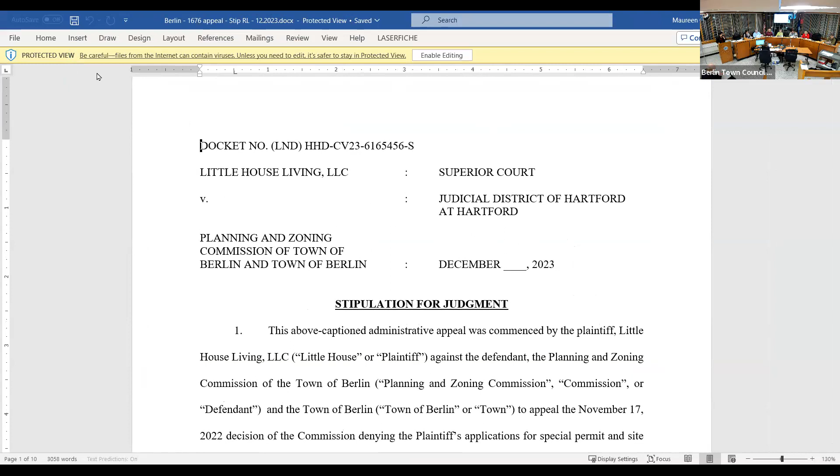And during the public hearing, the plaintiff argued that there's a need for affordable housing in town, and that the town is not exempt from the affordable housing appeals procedure that's in 8-30G of the Connecticut General Statutes, because 10% of the town's housing stock is not affordable.

So the statute does provide that to be exempt from the procedure, the town has to have 10% affordable housing stock. The public hearings, again, just where we are procedurally on those pending 8-30G applications, the public hearings have been closed, but the commission has not voted on those yet.

The deadline to vote on those applications has been extended, and this was by agreement with the applicant, to January 3rd, 2024. So then, on paragraph 5 on page 2 of the stipulation, it's the intent of the parties to resolve these matters without the time, expense, and risk of further litigation, and without any admission of liability or fault.

So I just want to make a comment about that.

I would say this too, I've been practicing land use law for 25 years now. It is the expectation of the court that in these matters, one of the first things they do when they get an appeal is they talk to counsel for the parties about resolving the matter.

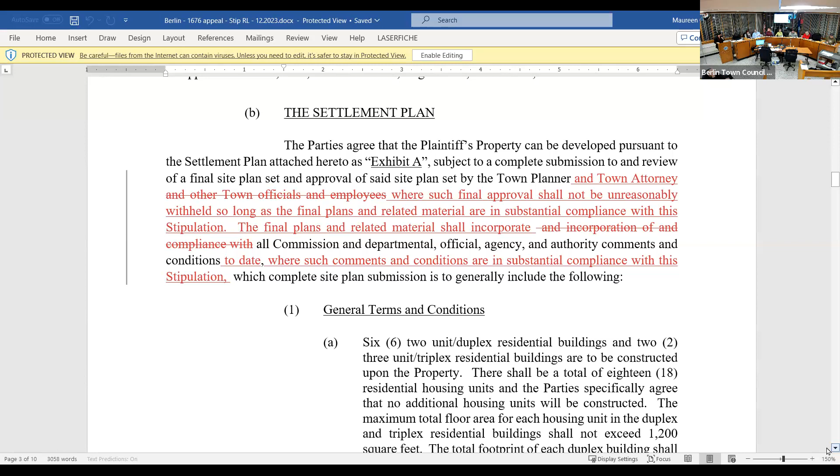So just jumping to the general terms and conditions, what's contemplated - this is B1A on page 3 - is 6 2-unit duplex residential buildings and 2 3-unit triplex residential buildings. So there's going to be a total of 18 units, and that was the number on the plan that got denied. The parties specifically agree that no additional housing units will be constructed. Then there's some specifics about the bulk requirements of those duplex and triplex buildings in terms of square footage, footprints, height, and so forth. They're all going to be 2 bedrooms, 2.5 baths with a garage.

And then one is going to be an accessible unit, a type A accessible unit. Again, we've got height requirements toward the end for the residential buildings, as well as the community center that will be an amenity. So the center island unit is coming out of there that was originally proposed. There's going to be a community center, and also a property maintenance room connected to that, with an overhead garage door.

You'll see further on too, it's mentioned there's a contemplated pervious patio area and a fire pit. So a lot was talked about as far as quality of life, so that amenity has been negotiated to address the concerns with regard to that.

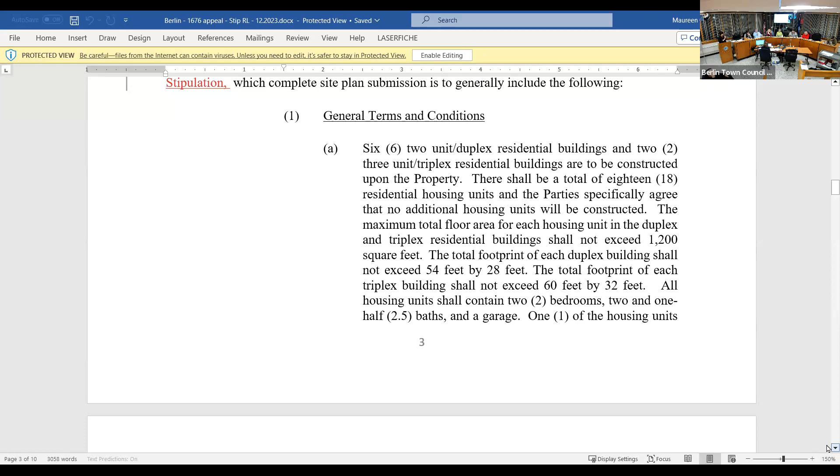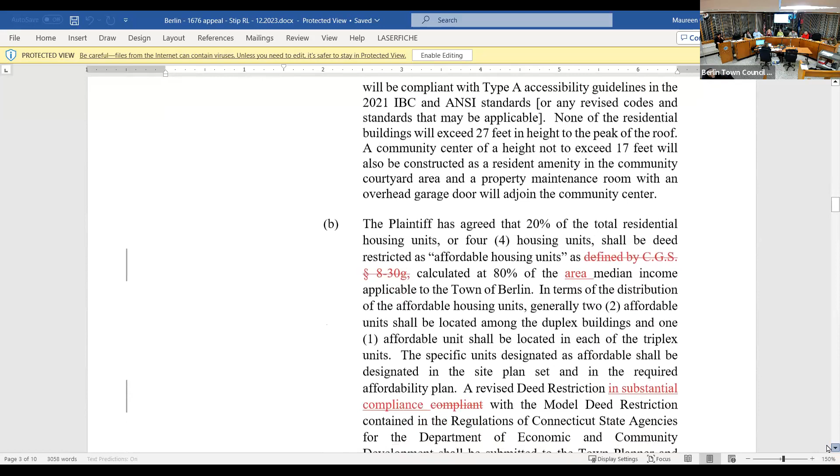I don't want to get into that right now because I want to get to Zach. But there's been quite a bit of discussion about architecturals. The architecturals are posted - this is in C, bottom of page 4 - covering the landscaping and the streetscape, material design standards, lighting, fencing, and signage. So you see details.

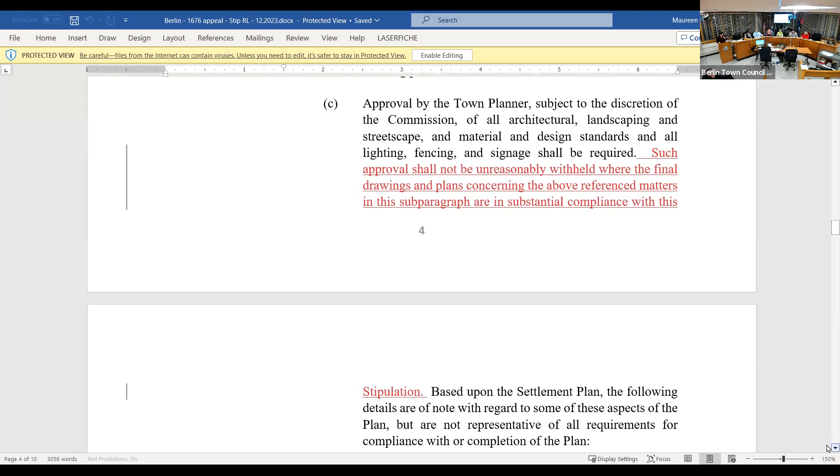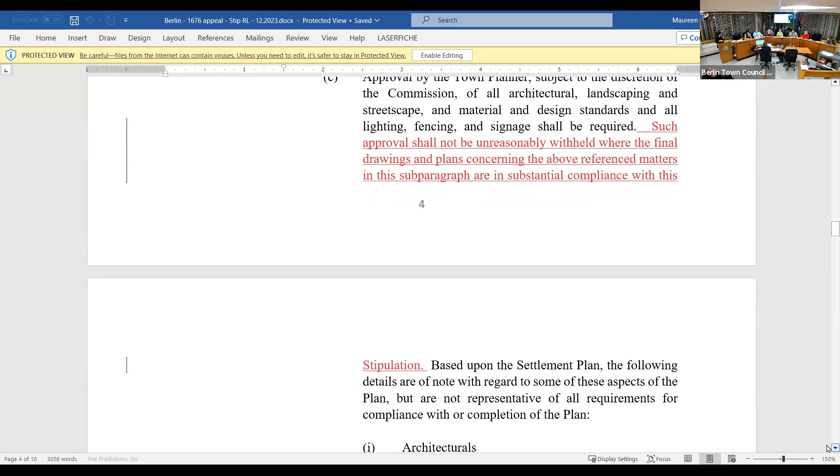When I drafted this stipulation, I wanted to point out some specific things to draw attention, because there was a lot of focus on certain areas. The architecturals are going to be craftsman in nature, and they'll have a natural color palette.

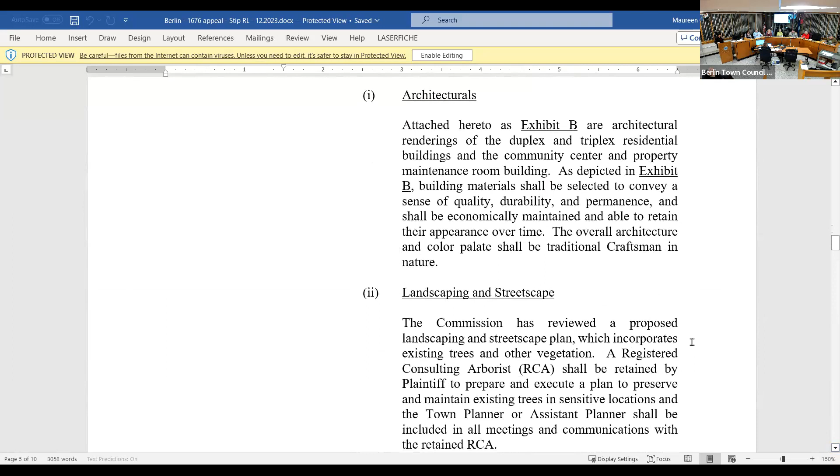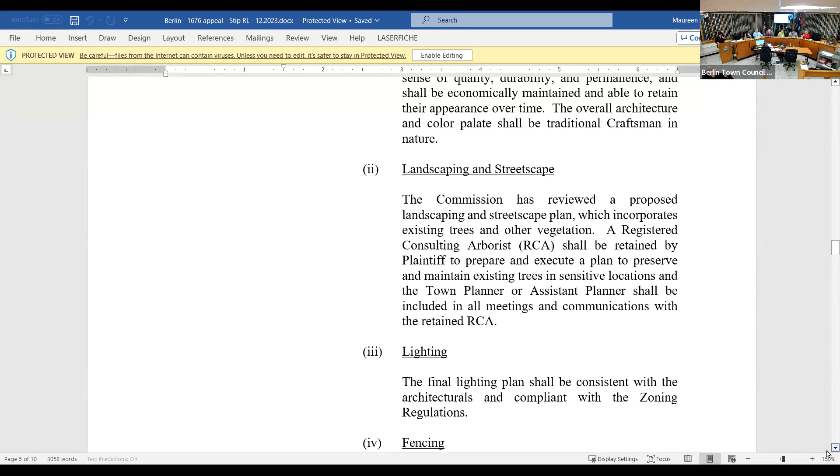What's contemplated is not just a buffer of trees, but also understory trees, and then lower vegetation as well—bushes and shrubs and all of that. There's a lot of detail that Zach will go through with you.

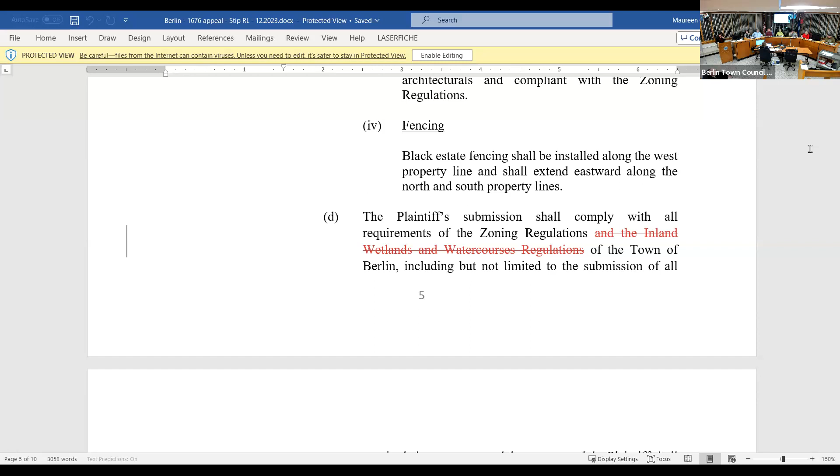I'll just mention that center area, the island area, the community courtyard area. I talked about the community center property maintenance room. The residents' mailboxes are going to be constructed on the exterior, and there will be parking spaces there too. In the northwest corner—Zach will point this out to you—there's also going to be a community recreation or terrace area. And all the housing units will have a patio in the rear, separated by a privacy fence.

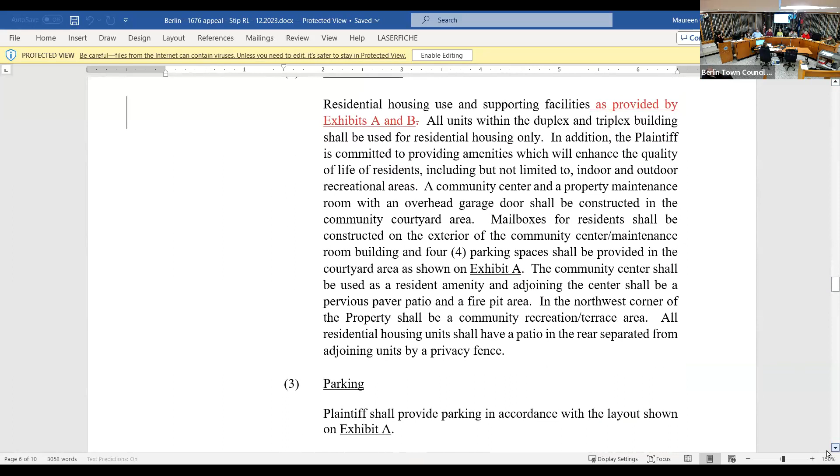The parking will be reviewed, but again, every unit is going to have its own garage. In terms of stormwater, there are some changes, because now we have that central courtyard area actually being used as well, which will really enable them to keep things on site. Zach will cover that.

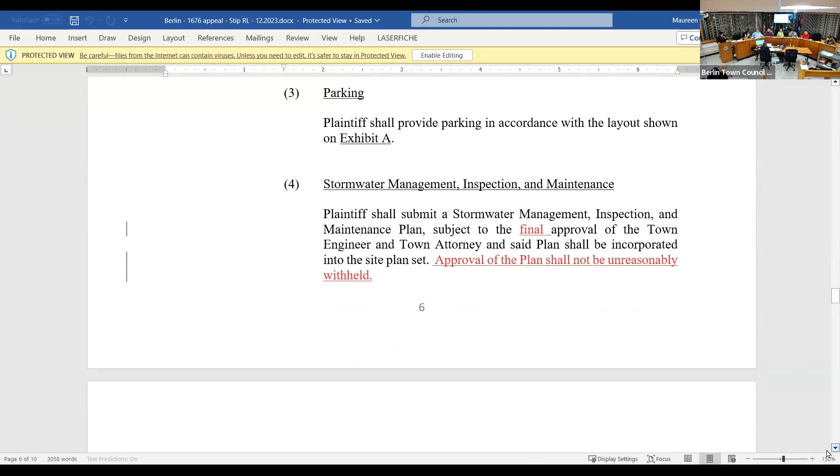As far as—and this is standard—I'm on page 7, number 5, 7B5 I think it is: the time frame for completion is 5 years, that's standard. There's the ability to get extensions. Those are permitted by the general statutes, but that has to be approved by the commission unless otherwise provided if something changes in the future. So you can read the details of that.

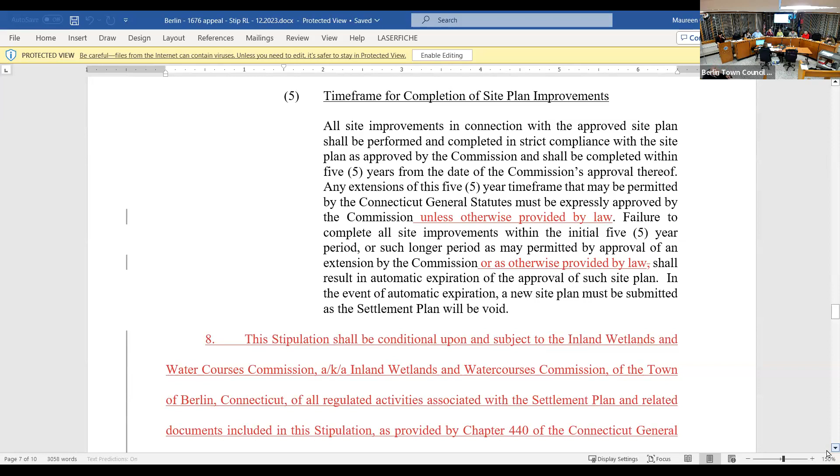A lot of the remainder of it is just like we're talking about. Obviously, they have a wetlands permit, so there are some things that have to be worked out with that. There's an enforcement provision in there, and in the circumstance where somebody's not performing, that's the thing about a judgment.

I just want to point out, and this is one of my final points: the thing about a judgment is that the court has continuing jurisdiction. So when somebody's not performing pursuant to the terms of the judgment, a party is able to go back and ask the court to enforce the terms. That's why lawyers like judgments, rather than just some settlement agreement that may or may not be in writing. So we always look to do a judgment because it sets expectations for how everybody is going to perform.

The stipulation is going to be recorded on the land records after the court enters it as a judgment. Page 8, paragraph 11 talks about the continuing jurisdiction concept. If somebody defaults, there's a provision about being able to get costs, otherwise we're each bearing our own costs. And we've got the terms inuring to the benefit and binding upon successors and assigns of the parties. I think that's on page 9.

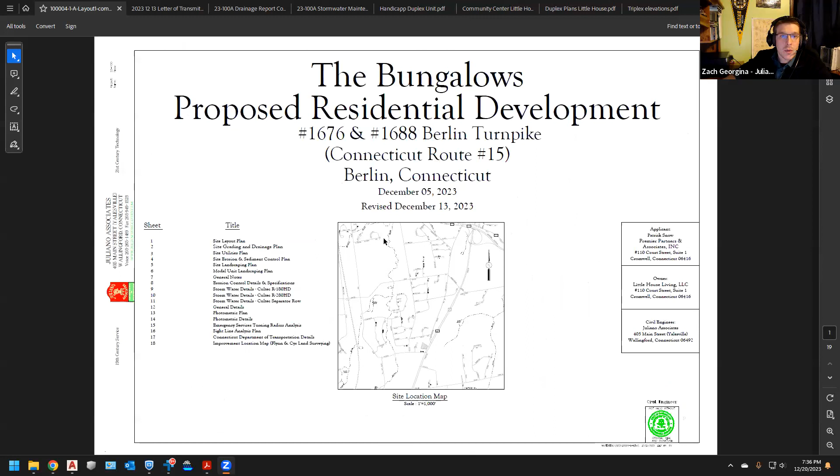The site itself hasn't changed, it's that same 1.9 acre parcel. What has changed is we've pulled the residents out of the center. We're now proposing 18 units consisting of 8 buildings, 6 of which are duplexes and 2 of which are triplexes, as we can see here. So we're consolidating the buildings, resulting in less building space.

This has allowed us to pull the buildings off the side yards a bit. We are maintaining that previously approved through wetlands 21-foot setback, and in the backyards we are now at a 46-foot setback from the property line to the buildings.

We've also tightened this area for the courtyard with a 20-foot wide drive aisle. With a focus on opening up this open space in the courtyard, we have a community courtyard of 4,339 square feet. In addition, by tightening everything up and increasing the duplex and triplex count, we've been able to make almost a 5,000 square foot community terrace, essentially a lawn and nature area in the rear, exactly 4,795 square feet. So some decent open green space in this area.

Up front, you'll notice there's a concern for health, safety, and sound. We're proposing 2 four-foot high earthen berms along the Berlin Turnpike. This will not only mitigate sound, but as the site drops away, it will act as both a visual barrier and, once planted, a pretty good sound barrier using the vegetation and the earth itself.

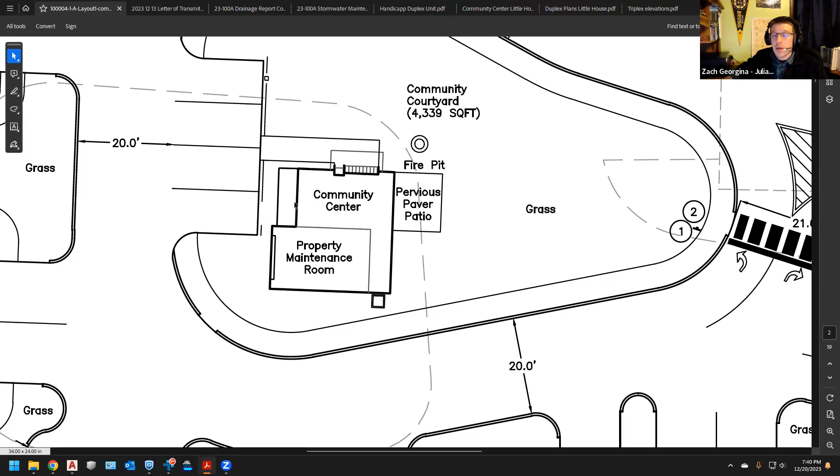Zooming out here a bit, we do have, as mentioned, the 4 affordable units. We've spread them out with 2 of them located in the triplexes, 1 located on the northern side.

along the wetlands in a duplex, and 1 located along the rear of the property on the Holly Court side. In addition, we have the ADA accessible unit, which I believe is a type 1. Pat, feel free to correct me later if I'm wrong, but I believe it's a type 1 of the accessible units.

This will come in with a van accessible parking space. As I mentioned previously in executive session, I don't believe this will be marked on the pavement. We don't typically see that in residential, but the assigned space is wider here to accommodate for that van access. This is also one of the flatter units in terms of grade, so it should be very conducive to that configuration.

All right, let's move on to stormwater, because I know that is a concern, and things get a little bit interesting just with the redesign here.

I understand this is a lot to look at here, but what we have is essentially what I'm going to refer to as System B. System B is now in the courtyard. It consists of 24 Cultec R-280HD units.

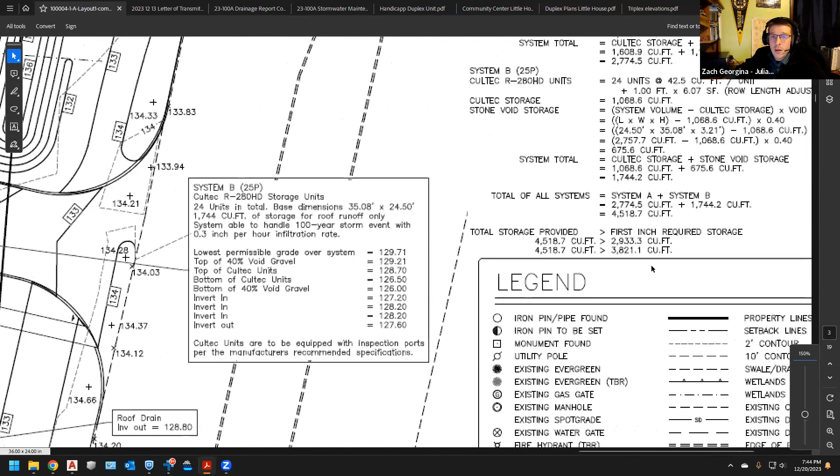So we have to provide that volume, and we do provide that volume. The equations themselves are on the sheet. I can walk you through them if you want, but we can just do a quick summary here of the total storage provided. We were required to provide, with the 2004 regulations, just 2,933 cubic feet.

We're providing 4,500 cubic feet of storage, so we far exceed that. As such, we do meet the 2024 version of that regulation, which is coming online shortly.

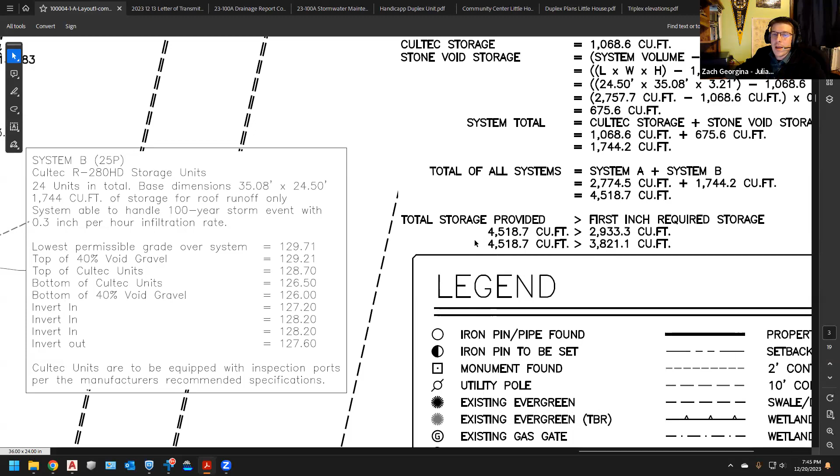And that requires storage for the first 1.25 inches of a storm event, which would end up being 3,821 cubic feet. We are providing, again, 4,518 cubic feet, so we meet that requirement.

In addition to that, we are decreasing stormwater runoff. Going through, I'm going to jump from this over to my storm data. Hold on a second, just bear with me one sec. Let me shrink this down because the controls for that are up top. I want to go over here.

Thank you. We're going to just jump down to our tables. Historically, with the site's previous development, essentially we were looking at, for a 100-year storm event, 11.5 cubic feet of water leaving the site. This water was hitting the existing buildings, the existing driveway they had, and the existing greenery.

And this is based on the infiltration rates of those surfaces, what the water leaving the site was. Our proposed site, even with an increase in impervious surface, is looking at going from 11.5 cubic feet of peak flow off the site down to 9.5 cubic feet.

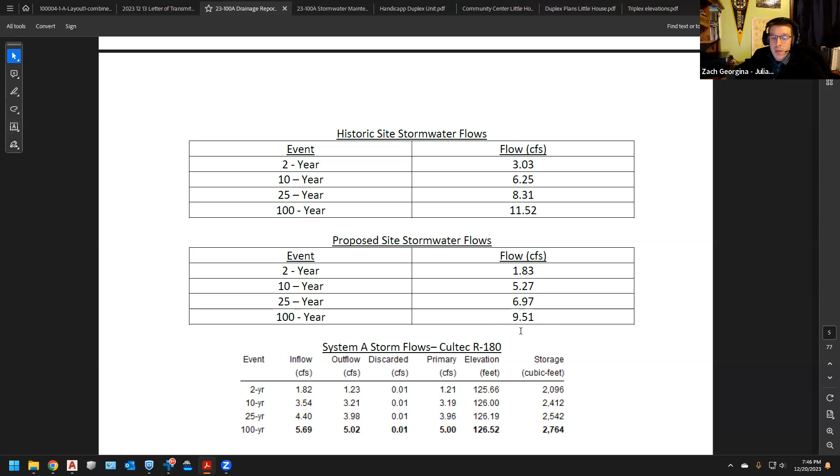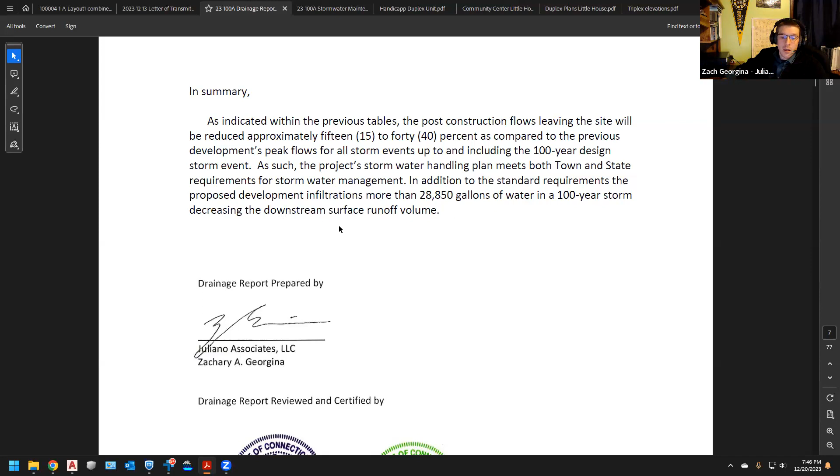So that's a fairly sizable reduction just in straight flow numbers. In addition, beyond what the state or local requires, I reviewed the actual infiltration volumes into the ground. We're essentially removing close to 29,000 gallons of water that would normally just be sheet flowing into the wetlands previously. So we're infiltrating the size of a residential 20 by 40 swimming pool, putting that directly into the ground instead of letting it flow offsite like it currently does. That is the summary for the stormwater system and how that works.

You can see here where we have some of the grading, and the berms up front along the Berlin Turnpike.

Let's move on to the landscaping plan, which I believe is going to be our major concern for aesthetics. We have done quite a focus on landscaping, especially along the Holly Court side, but let's work our way in from the Berlin Turnpike.

As I said, we are going to have these two earthen berms. They're going to be planted with arborvitae along the peak, with some 8-foot bushes that are rhododendron and inkberry in an alternating pattern along the inside, to create this wall of greenery for the residents while also shielding the Berlin Turnpike from looking at our structures.

As we come in along the central aisle, the focus here was on canopy trees, getting close to 30-40 feet in height with good spread. This should feel like driving into a forest, where once these trees hit maturity, there will be span and shade, and you're not going to be driving into a very stark, barren grass area. It'll be very well landscaped, as we're proposing around the central courtyard.

To the north, due to construction, we are going to lose some of these existing greeneries. We are proposing to replace them with arborvitae, essentially a solid hedgerow just on the inside of the property line, to allow that to grow.

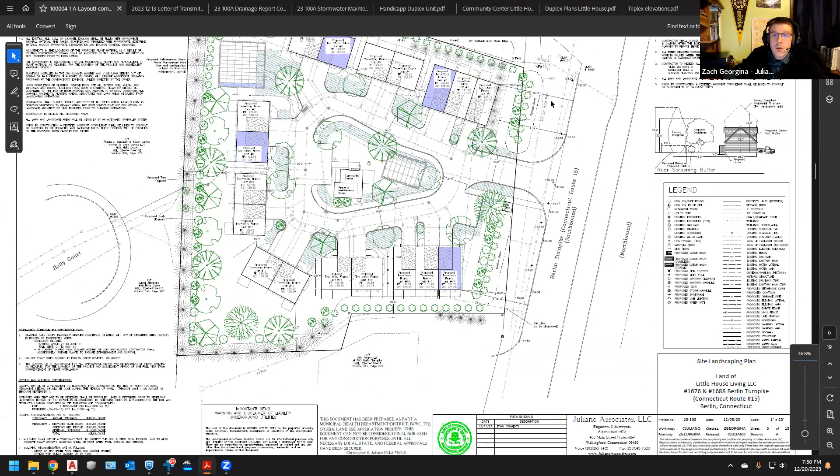If we zoom in on this rear screening buffer, this is just a cross section to show exactly what we're proposing. The existing evergreens are approximately 40 feet in height. Our proposed deciduous shade trees range in mature height from about 28 to 40 feet, so we'd be looking on the low side around the 30-foot mark. We also have 8-foot bushes for mature height - I have them shown at 6 feet just to help understand the visual before they reach full maturity. And the proposed fencing is squeezing right in here - that's the black estate fencing.

We should see this bush as it continues to grow, actually putting limbs through this fence to essentially hide it, so that it won't be an eyesore for anybody, and will grow in and blend into the environment we're proposing.

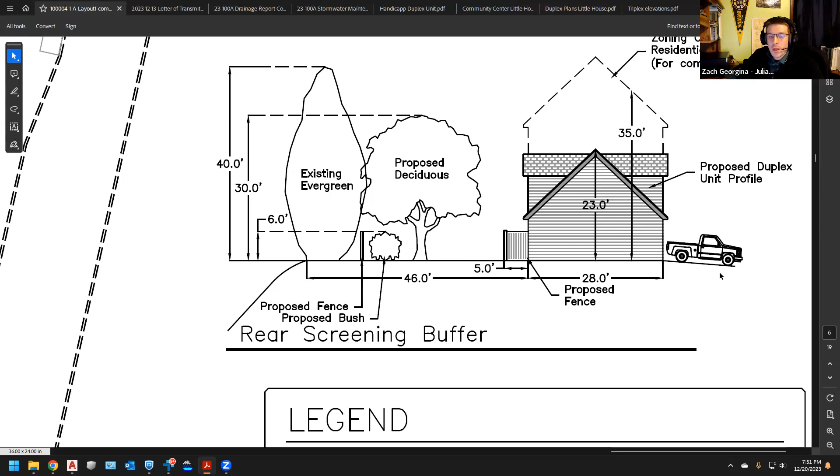For scale, these are to peak the 23-foot duplex units, showing how tall they will be compared to the evergreens. This is a scaled distance from the setback, so you can see 46 feet, 40 feet, everything is to scale. For reference, this is a to-scale crew cab F-150, showing what this cross section along the back area is going to look like.

Let's jump back up to the construction sequence. We are proposing running a silt fence along the entire downhill perimeter of the property. Areas with larger slopes, like along these berms on the downhill side, we are going to be encasing in silt fence as well. As part of construction, we will put in a construction entrance, essentially an anti-track gravel pad designed to knock loose any dirt on vehicles entering and exiting the site, to isolate this site from the Berlin Turnpike and prevent soil transportation onto the turnpike. We are looking to keep our stockpiles as much as possible centrally located.

The first step is going to be coming in and installing the in-ground utilities, and we're going to try to keep as much of this stockpile material in the center of the site for as long as possible. Once we get to the point where we have to install the underground utilities and underground stormwater system, these two stockpiles are no longer to be used. We just don't want to be stockpiling soil material on top of those infiltrator units for any length of time.

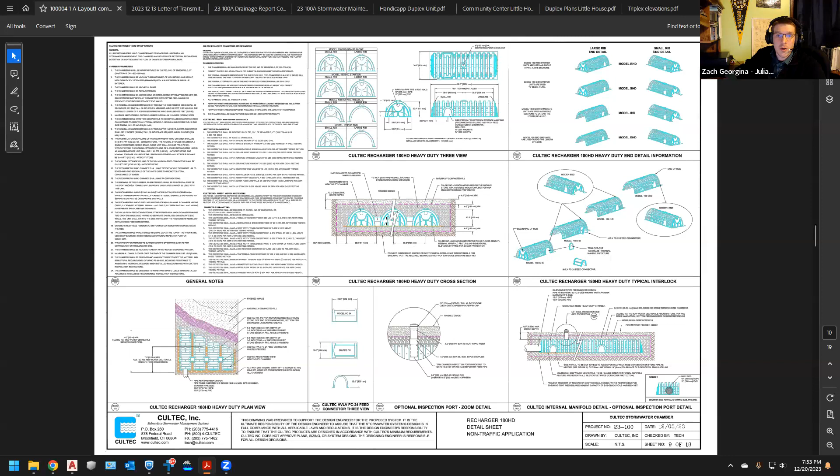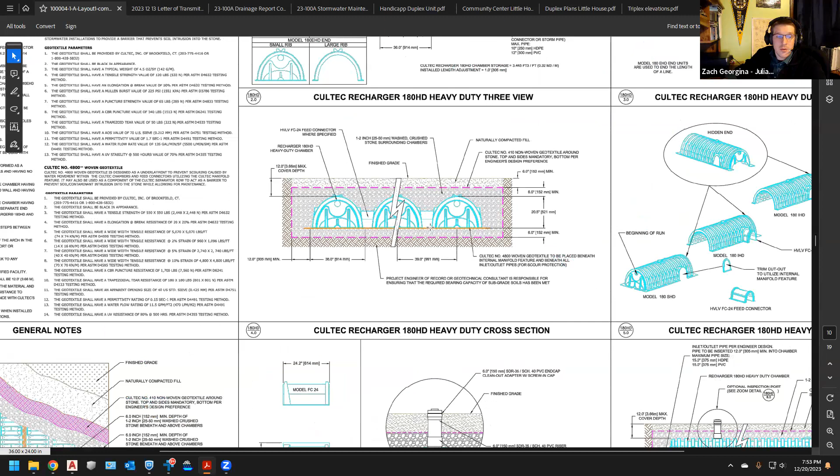These units are plastic arches. They do provide a lot of strength, especially once they're installed and backfilled with gravel, but they are hollow units that water will fill up and then infiltrate through, not only through the bottom but also along the perforated sides, allowing water to fill up the whole gravel void around it. That's the concept behind these stormwater systems.

The two units, the isolator row, likewise function this way. This row is wrapped in filter fabric, so water fills into that. Once you hit the flush point, it bypasses, not only filtering through these but bypassing into the remainder of the units and filling from there. I believe this covers, for the most part, everything we're looking at.

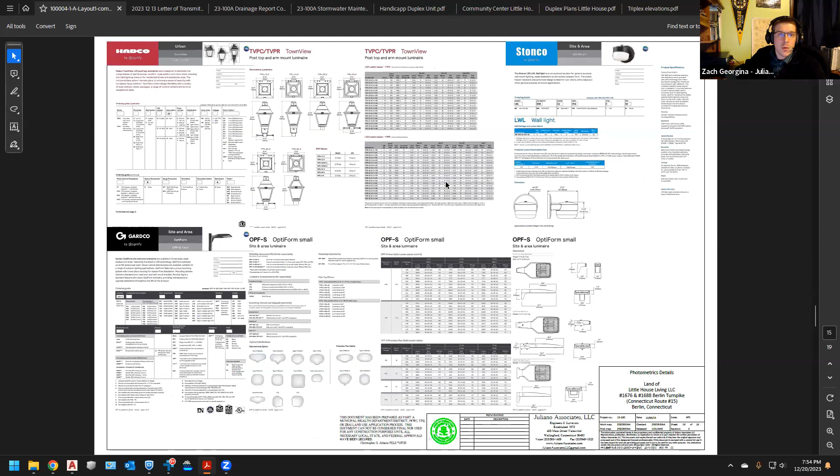Photometrics: what we are proposing is to keep our main lighting as centrally located as possible. By building code, every unit has to have lights for doorway access, that's state building code. On the local end, the town requires a maximum and minimum lumen rating for parking and parking sidewalks. So by having a couple of area lights, better term than floodlights, each unit will have their own parking area lights to light the area during dark hours. We'll also have a couple of central street lights around the corners to light up areas where cars need to make a turn, making visibility on site overall a little brighter.

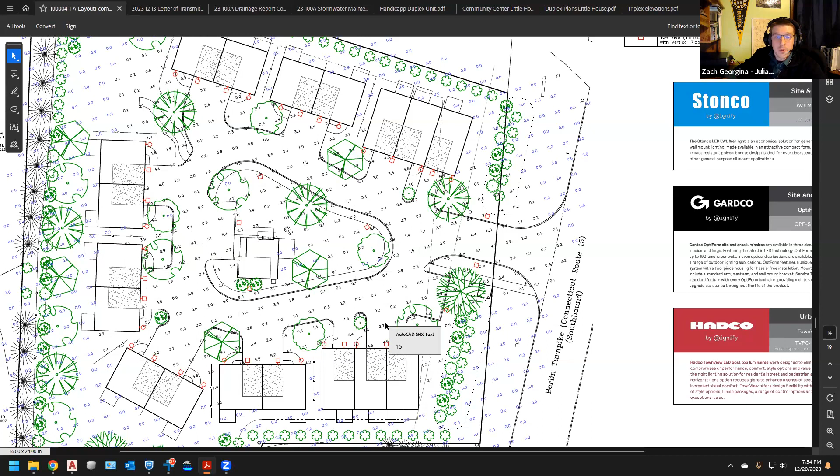At that point, I want to open it up if there are any questions or comments, or Pat or Chris, if I've missed anything you want me to go over, please direct me where I need to go.

Commissioner, any questions? Yes.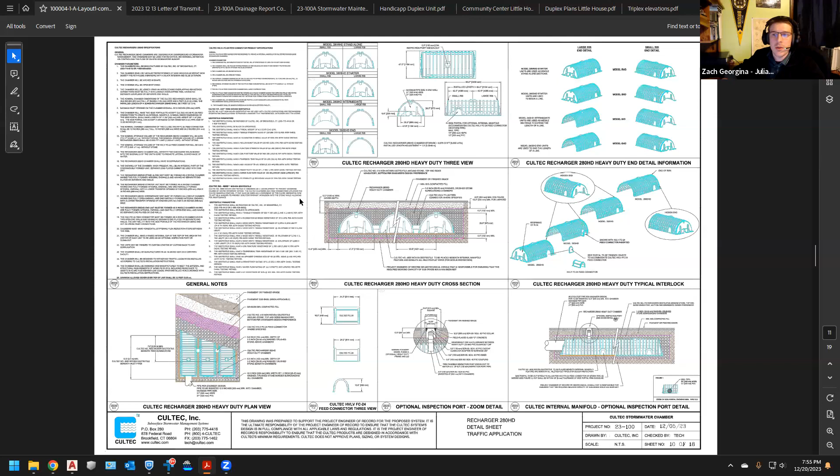I noticed that there's an indication that you're going to be removing the hydrant. Are you going to be replacing that anywhere? Correct, yes we will be. We actually have two fire hydrants. Let me pull up the site plan. We are replacing with two Mueller 5 1/4 hydrants. The first one is going to be right up front. This hydrant is just not going to survive construction purposes, so we'll remove it and replace it with a new standard model right at the front of the site. The other one is located almost directly on the other side of the loop. So we will be having two fire hydrants on site instead of just the one by the turnpike. Thank you.

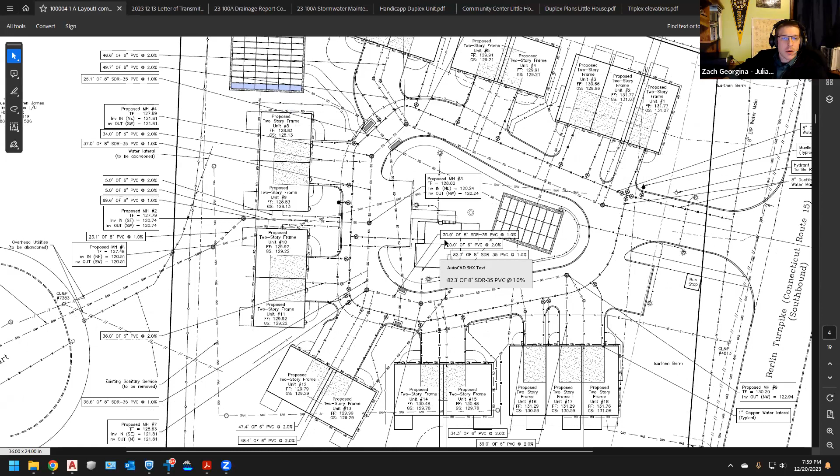I understand the question. So let's go to the stormwater sheet where we actually have a little bit of grading and callouts, that should help us understand this better.

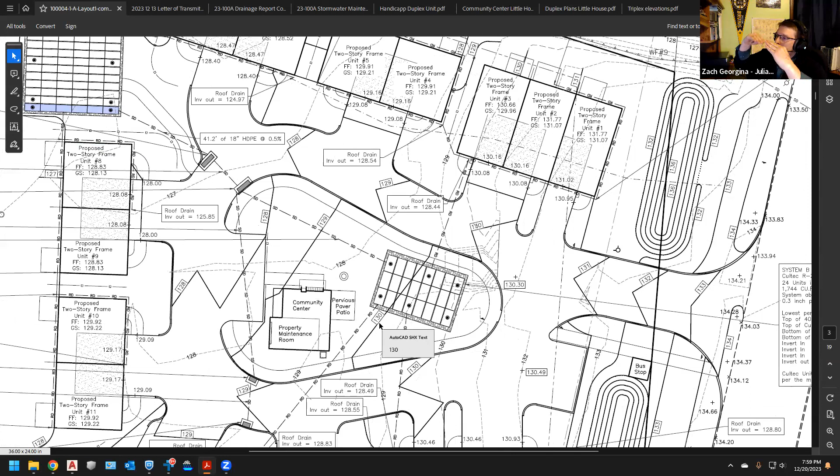The central unit is going to be almost invisible. You can see this contour has a little bit of a kick, so instead of being perfectly flat, there's a bit of a bow out, a flat area, a slightly steeper taper off, and then back to regular grade. We're talking maybe 3 inches of elevation change over a distance of about 5 to 6 feet. It's not going to be perceivable as, oh, that's where the stormwater system is. It'll just look like a slight change in grade.

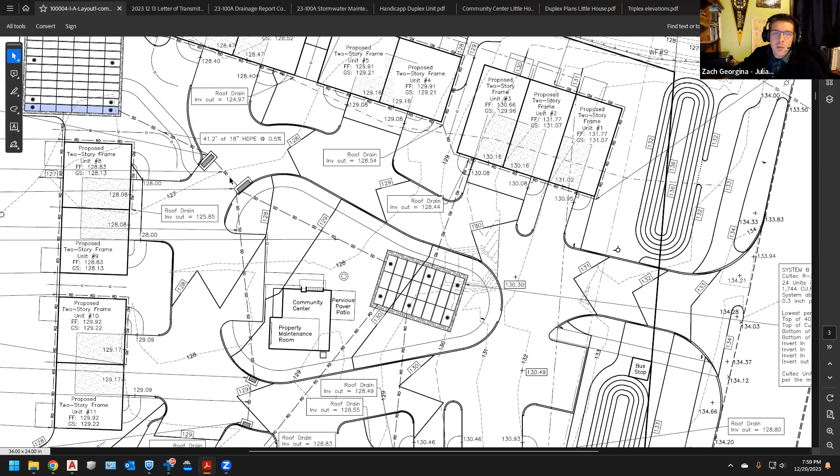The other unit is going to be slightly more tabled, but as we get to the back here, this entire area is fairly flat. Let me get the exact numbers, this is sheet 4, we'll go to sheet 4.

My question goes to the community center or community space. I understand what you're saying, but my concern is that the space occupied by this system is also still going to be usable by the residents. In other words, would somebody be able to plant a little community garden there? A raised garden, I would say yes. I would lean against an in-ground garden.

So if someone in the community wants to put in some sort of raised garden bed units, that would be acceptable. On the low end, these are going to have 6 inches of soil cover over the gravel system itself, and that is adequate, similar to what you typically see for established lawn root depth of 6 inches worth of grass growing.

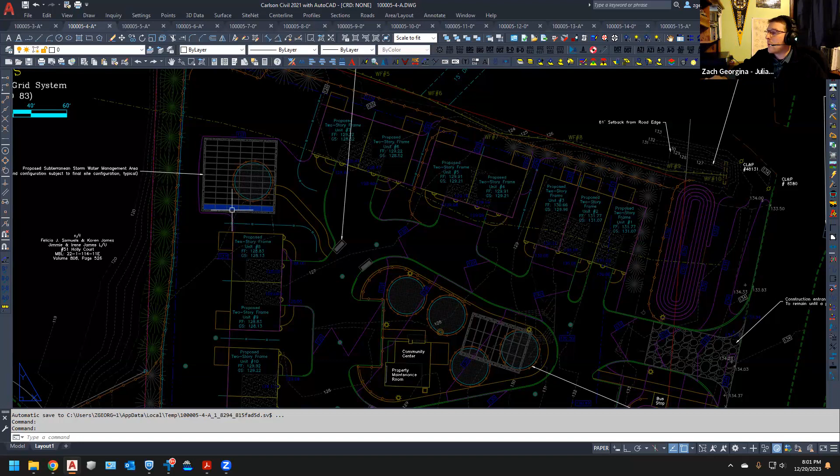So will it be usable space in terms of if someone wants to come in and start growing corn? No, it will not be. But in terms of kids, adults, whatnot, playing a game of frisbee on top of them, absolutely, it's just going to be a lawn space. Should the community decide they want to put in raised gardens, I think these units would be more than capable of handling that, as well, since the concern is you don't want to be excavating material over these. If you're adding material, that's less of a concern than digging down and putting something with a foot or two of root growth straight down into the system itself.

Okay, all right, thank you. Any commissioners?

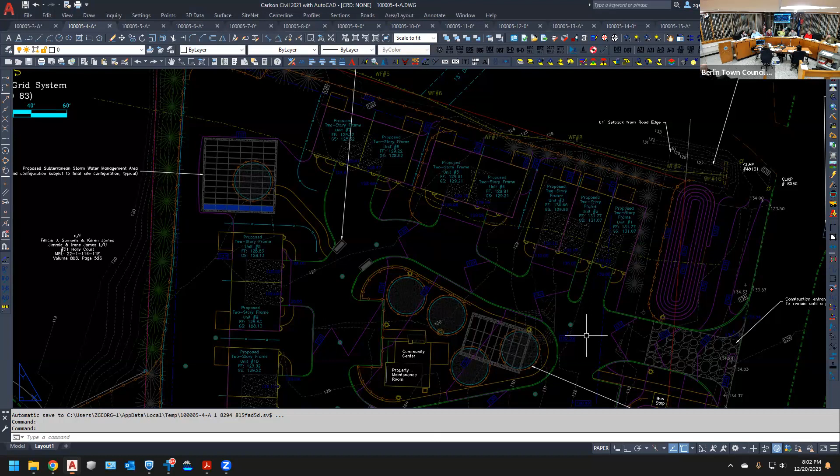Tim, the last time we were here about these plans, there was a question about the lighting units themselves, which lighting units were being used where. I just want to know about the urban lighting ones, those are the poles, the regular street poles.

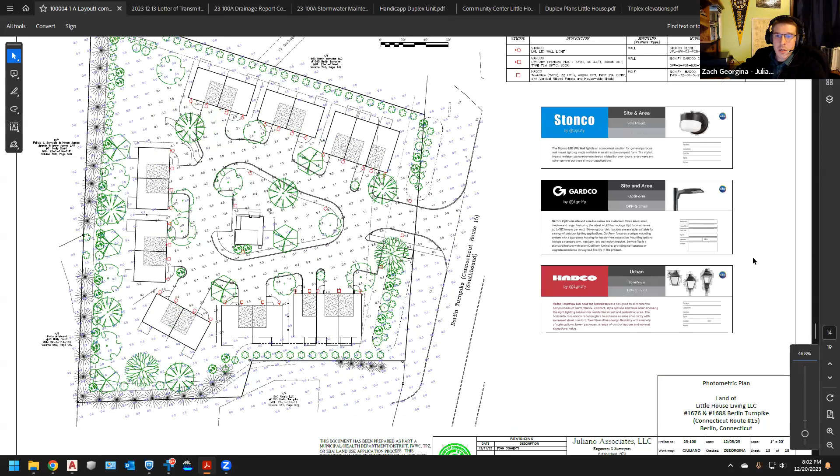Yeah, let me navigate over there real quick. Hang tight with me. All right, let's go to... there we go. Okay, so I'm just gonna zoom in over here on these guys. Do forgive how my computer's rendering around these lights a bit.

But the Stonco lights, these are door lights. These are next to doors. These are next to the sidewalks. These Gardco lights, they have a wall mount option. They will be the wall mounted over the parking areas themselves. So these will be on the side of the units, lighting these areas in the parking zones themselves.

The Hadco units, we are going to use the top pole mount option, and these are going to be functioning as street lights and area lights along the roadway or a driveway. Entrance doors are going to have the pack light up there, the Stonco light, or the...

The Stonco light will be next to the doors, correct? Okay, so the first urban light is a wall mounted light. The next ones are pole mounted lights.

And the urban light next to the door, the wall mounted urban light would be better than the pack light up here, the first light, the top light. That's why I'm asking the question. Usually the decorative light is next to the entrance door and the pack light over the garage door.

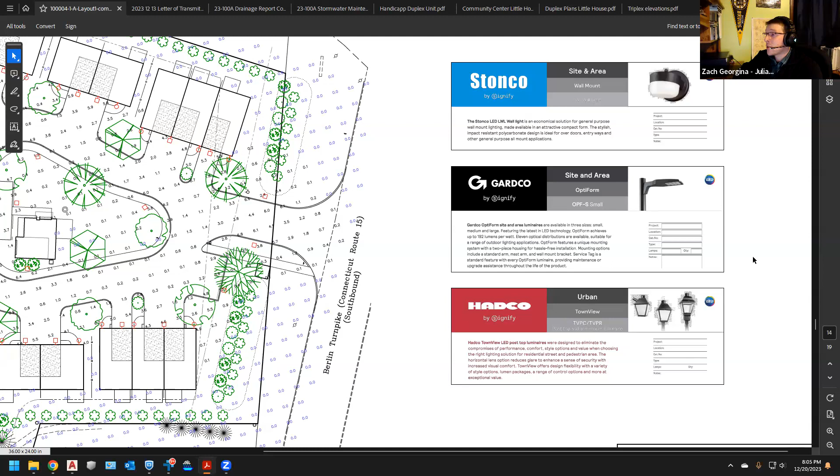As such, based on where these lights shine, the Stoncos don't provide a large area, but they provide a small focus light. The Gardco provides more of a projecting out light, and the Hadco has more of an area, a downward cone light. This combination allows me to best meet the intent of your published regulations, and that's why these lights were selected.

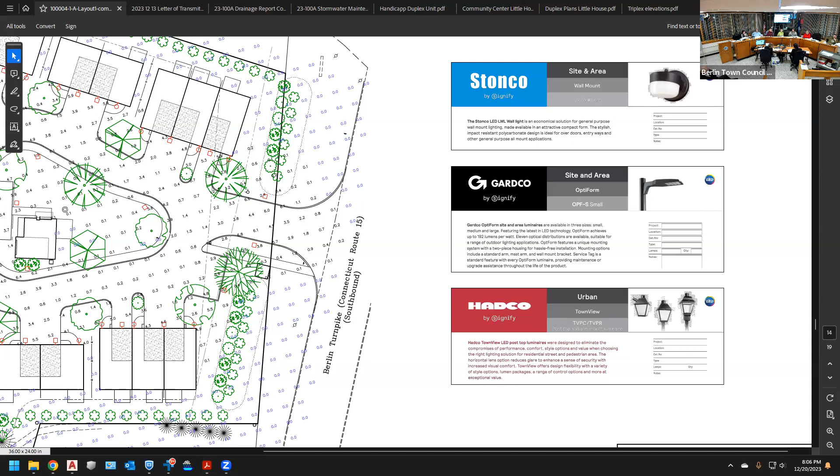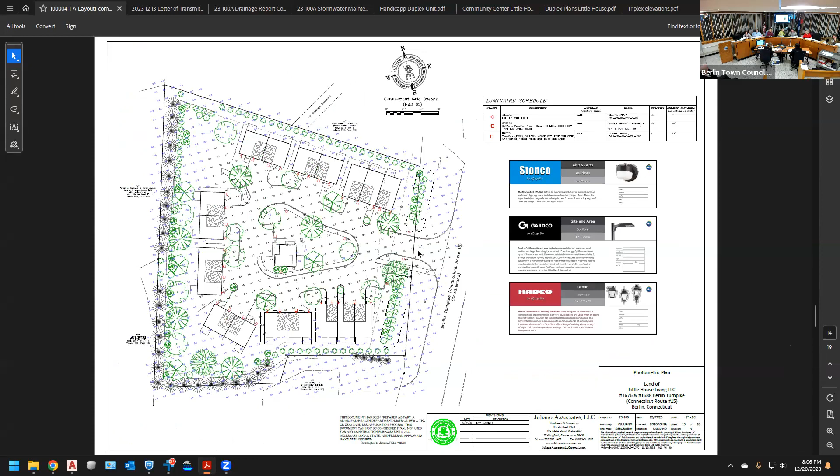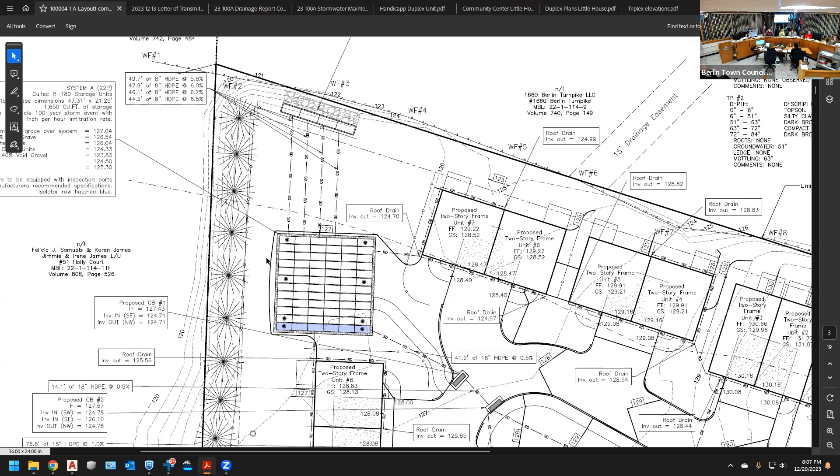Yes, back to the drainage page. You had mentioned in that community corner, is it the southwest corner where there's a northwest? If it's an overflow, it takes off for areas down toward the neighboring line. How does that impact? What does that go into as it runs off? If it's an overrun or an overfill, how does that impact the site?

So there's two elements of this. One is a lot of people would be concerned with overflow - is it going to erode? That would be transporting silts, fines, and what have you. What the level spreader is designed to do is decrease that. Essentially, velocity is flow over area, so this increases the area that the volume is crossing over, so you see a slower velocity leaving the site.

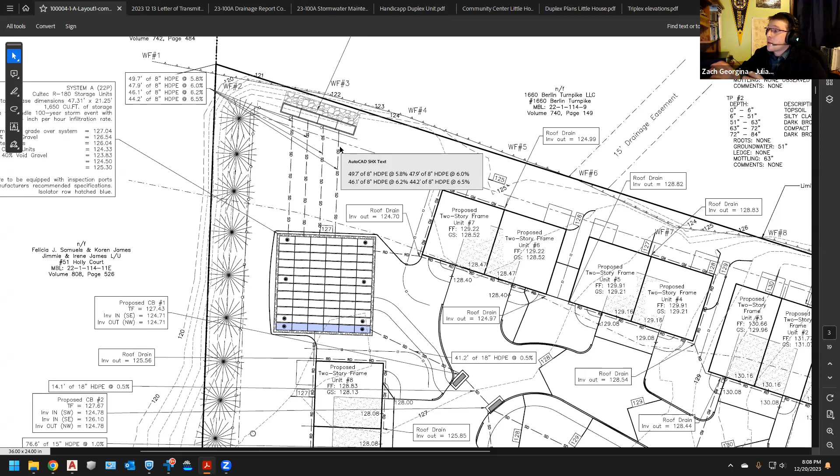In addition, the level spreader is feeding onto riprap, which again slows the velocity of this water down, so you're not going to see erosion. That may not fully address your concern, but I know that's always one that comes up: if we're pumping water out of this, is it going to be eating away? The intent of the level spreader is to mitigate and prevent that from happening.

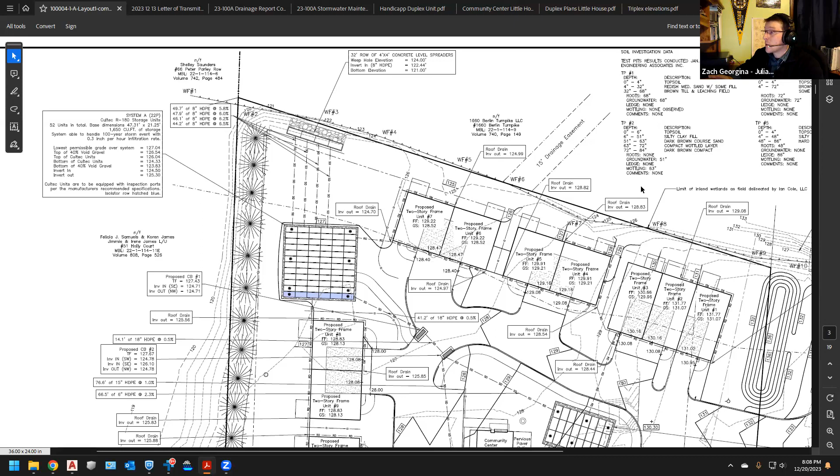The second point is this level spreader is feeding off into the existing drainage swale and wetlands that exist along the Berlin Turnpike, which other commercial properties are currently utilizing. Now, I know there are concerns about the wetlands itself, but that is why we're decreasing the flow this site was putting onto this wetland. So we are flowing water out, but we are flowing less. Our peak flows are less than how the previous development was, so we're decreasing our flows off-site, even though we are directing them directly towards this wetland.

And I think that's what I was trying to pull out of your information there. One last question: our neighbors on Holly Court - will they see an increased flow, a decreased flow, or about the same water runoff once we get all these measures in place? What's their impact going to be?

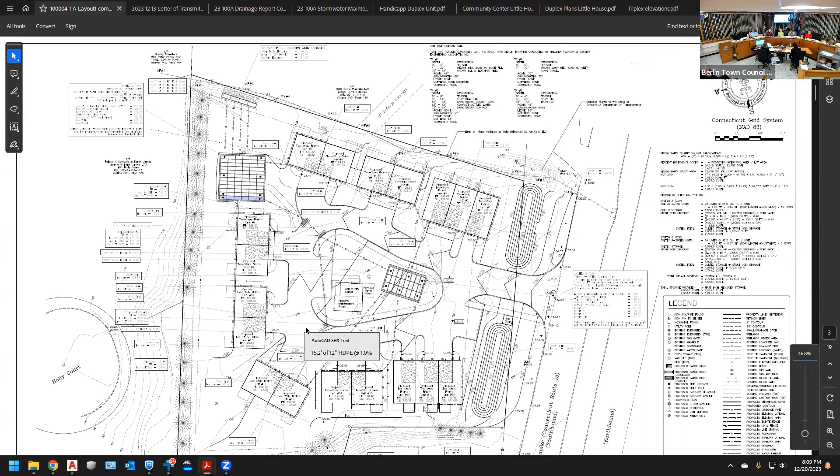For the most part, this site as presently developed, as the motel development had, there was not a lot of water being directed towards Holly Court. The site was pitched naturally or man-made - I wasn't around when it was first developed, so I'm not sure where development stopped - but it was pitched to direct water towards this wetland up top. What we are doing now, we are not proposing to change that grade to pitch water towards Holly Court.

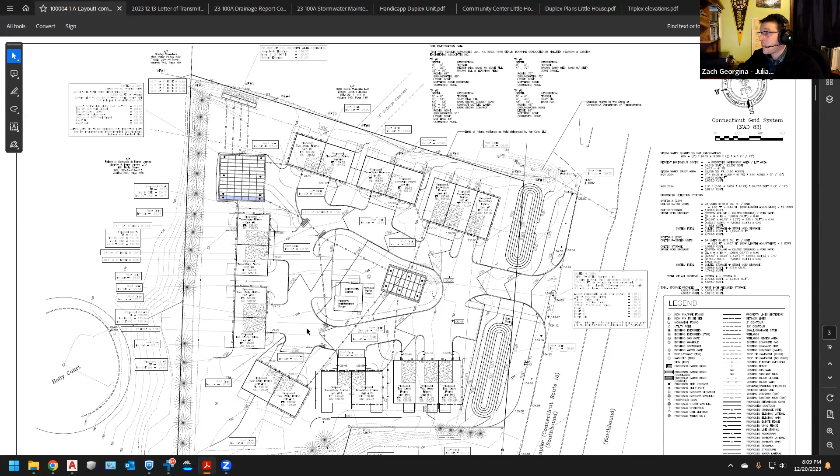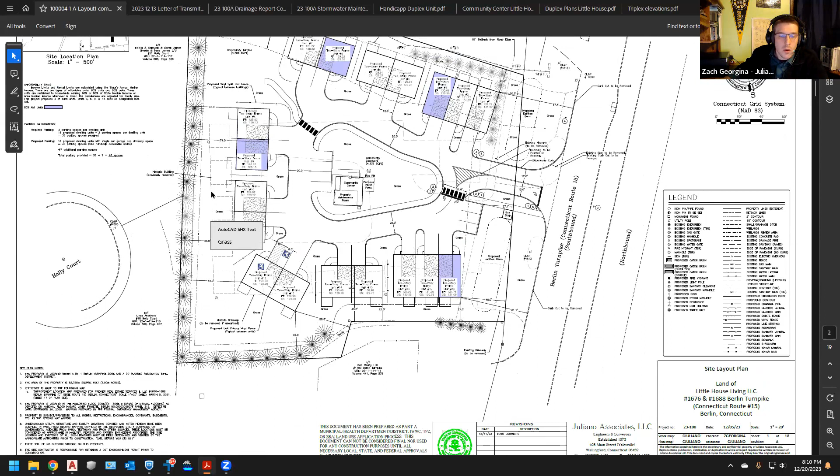In fact, areas that previously may have been sheeting water to Holly Court are now being graded. Essentially the buildings - as I motion to my screen, which no one can see - we are taking this water. I suspect the previous units back here - let's go back to my first page, you can see the old units here. These squares are the old motel buildings. These units did not have an underground detention system, so I suspect they most likely had roof leaders pouring water off in various directions.

We are now taking this area that was paved and impervious, turning it to grass, and taking all of these buildings and infiltrating this water. So I would suspect a decrease in water being directed towards Holly Court because we are increasing our pervious surface, and the impervious water we do have, we are putting directly into the ground.

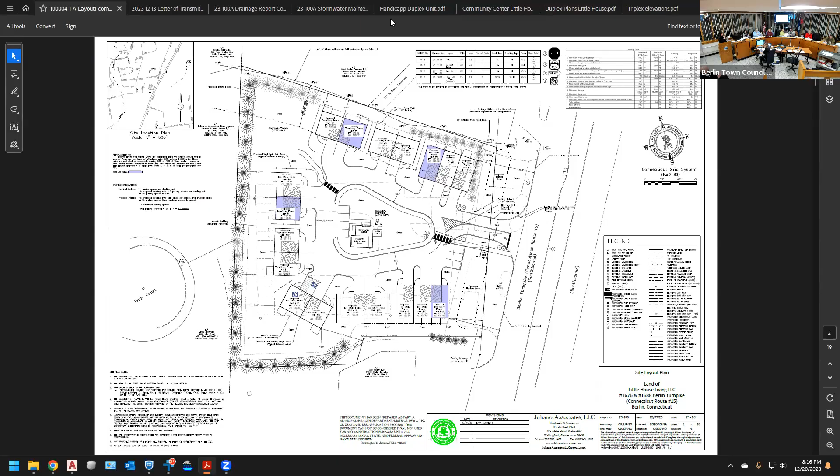That's on page 7. So the applicant has agreed to 50 years. That makes me a little bit happy.

As far as the administrator, the approval of the administrator, the applicant has agreed to some language that I drafted with regard to that. It's mentioned earlier, but if you turn to page 13, it really sets that out. First, compliance reports — that last paragraph there, the first six, well really seven paragraphs, have to do with the responsibilities, the duties of the administrator. The town planner is going to receive the annual report on January 31st. That's pretty standard, typically see January as the milestone.

Below that, I did revise it — it now says that the selection and designation of the administrator is subject to submission and confirmation of receipt by the town planner of a signed sworn statement, executed by the proposed administrator in the presence of a notary public, that the proposed administrator is qualified, experienced, and capable of performing the duties enumerated above, and specifically attesting to — these are two different things — the proposed administrator's qualifications, experience, and abilities to serve as administrator, and his or their commitment to perform said enumerated duties. And it goes on: if the proposed administrator has not previously served as an administrator, then certain performance standards and monitoring requirements for the administrator may be imposed.

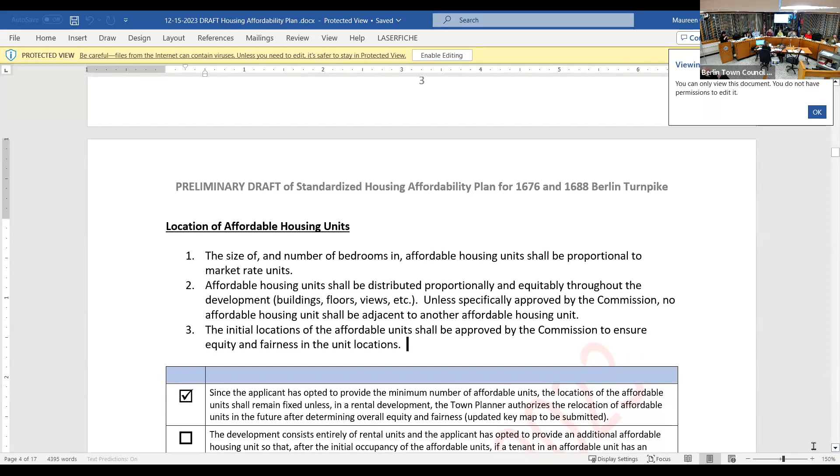Any proposed change in administrator shall be promptly reported to the town planner and require submission of a signed sworn statement for the newly proposed administrator. So just kind of reinserting and clarifying what's in the box that followed. And then I changed the information piece that followed to just indicate receipt of a signed sworn statement for the following to serve as initial administrator confirmed. So that's what we did on that, and the applicant is in agreement.

So those, I think, were the two primary issues as far as the affordability plan is concerned. Jennifer, just really quick — where is it noted about the 50 years? Is that on page 7? I think that's going to be on page 7. You'll see that first box on term of restrictions is checked. Glenn, if you want to confirm — Glenn Chalmers, just going to.

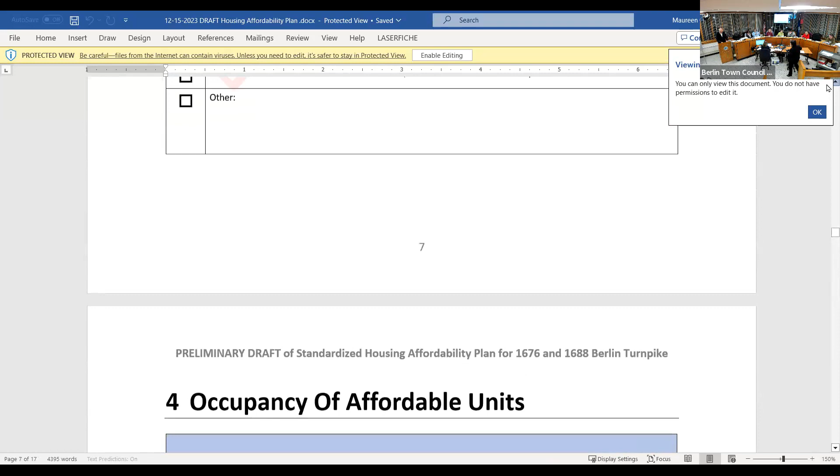I see 40 years, but it doesn't say 40. For the record, I think the way this form is set up on page 7, there are actually two components. The first is the initial term of restrictions, which says 40. Below that is the subsequent term of restrictions, where the box is checked for an automatic renewal of another 10 years, unless the applicant proposes an alternative which the commission accepts.

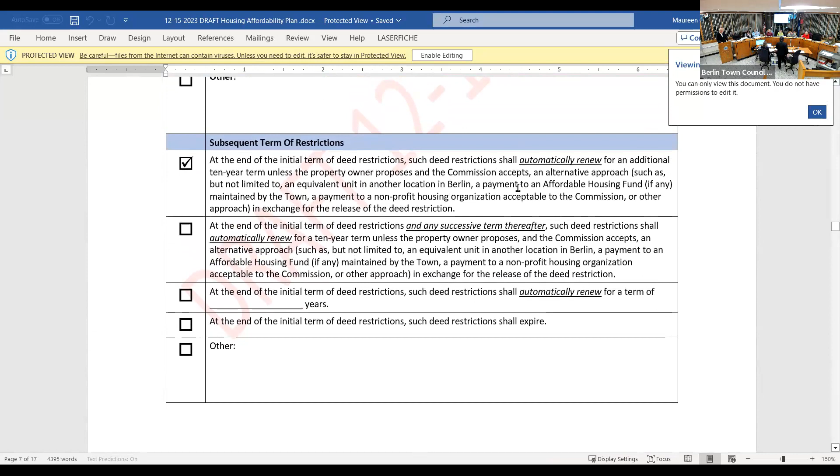Okay, all right, thank you. Is there anything else, Commissioner? All right, so let's do... well, you do have the option, since it's on your agenda, to go into executive session. Excuse me, Jennifer, sorry. Okay, town attorney? Yes.

Attorney Smith: Just very quickly, good evening Madam Chairwoman, members of the commission. I'd like to, on behalf of the team and in particular Patrick Snow, thank the commission, your town attorney, and town planner for your efforts to get us to where we are this evening. Just three comments on the stipulation since you're going to be voting on it.

I know I sent these to your town attorney, Attorney Capola, earlier this morning, but there were two typos and one clarification. I just wanted to make sure the commission was aware before you vote this evening. At the top of page 3 of the stipulation there's a typo. Attorney Capola, I think you received this email, I don't know if it was incorporated. But anyway, on page 3, first line at the top, the word 'and' should be deleted from 'any final permits.'